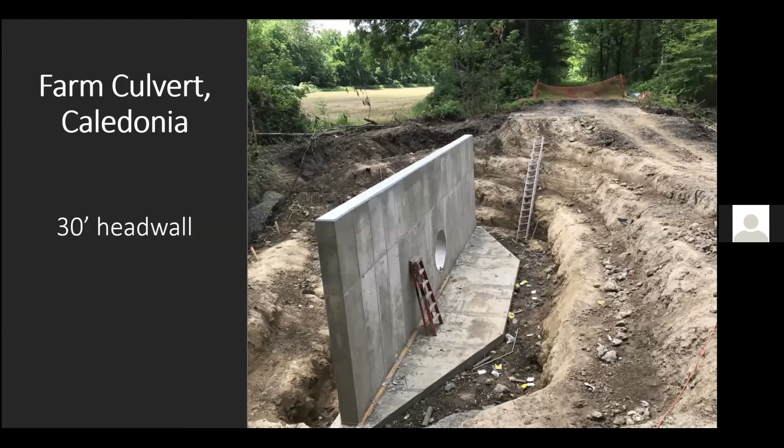This here is what we call the farm culvert. It's over in Caledonia, just north of the Erie Attica, which is north of Route 5. This is looking south on the trail. That head wall, that culvert head wall there, is approximately 30 feet long and about 15 feet tall. It's on the east side, and it's a poured concrete wall.

Here we have another angle. Once we got the two head walls up, then we had to cut into the trail. And that culvert pipe is 3 feet across. This is again looking south.

I'm sorry, I had to admit someone. I have to multitask. So we're looking south on the trail.

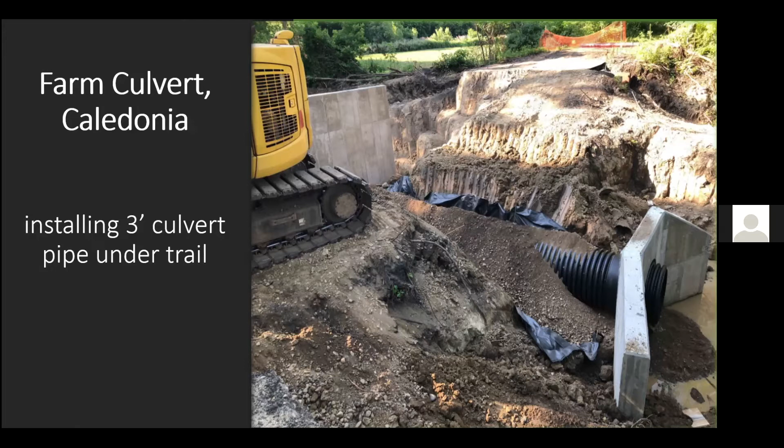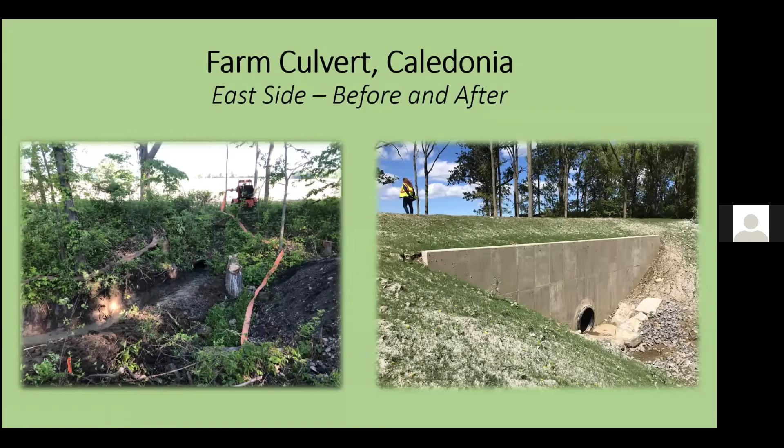Okay, so here is the before and the after on the farm culvert. On the left, you could see the old pipe in the middle, the center of the picture, and it's half buried. Really doesn't help anyone as far as drainage goes. On the right-hand side, you can see we're looking north on the east side of the outside of the culvert. I know that's a lot of direction there, but that's where we're looking north.

So you have a nice before and after picture here. If you look in the midway part of the picture, you'll see light green grass, and then you see the dark green crop out in the background. The reason why we put so much effort into this culvert was that the farmer here was having a lot of difficulty with flooding. As you can see, when the crop was planted, it had to go around the flooding, which is what the light green was. So this was a good time to do it. We decided to fix this issue, and now the farmer can use his field next year in its entirety.

All right, we also did some culvert work. This is called White Creek Culvert. This is just a little south of where we just were, but it's also in Caledonia.

This is some before and after pictures. On the left, you see that we had some trees growing out of the culvert. There's a lot of organic matter there on top.

The organic matter is a 50-50. It stabilizes, but the roots also cause damage over time. So it's really not the way to go as far as maintaining your culverts.

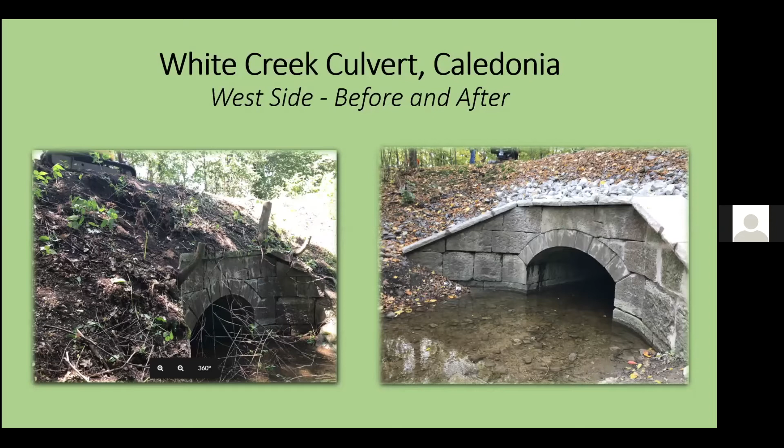On the right here, you can see they took out a lot of organic material and put in the capstones. Those are the large flat stones that you see on top there. A lot of work went into those capstones.

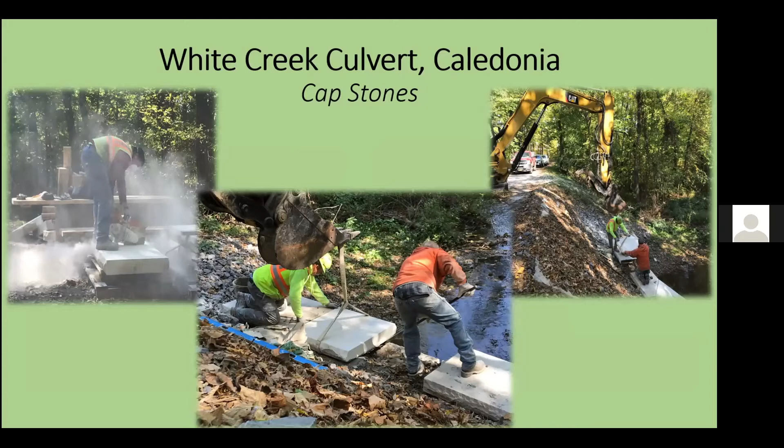Just a couple of pictures here - on the left, you see them cutting the stones right there on site. Then they had to lower them down with the crane and muscle them right in there, and then mortar them. A lot of work, a lot of physical labor went into these.

This is on the east side, same culvert. You can see before and after they were scooping out the organic material, and then now we have nice capstones. You see a lot of the cobble-sized stones that we put on top of the capstones to assist with stabilization

of the trail and so forth. Because that was one of the bigger issues - it was eroding into the trail. And we weren't about to lose that.

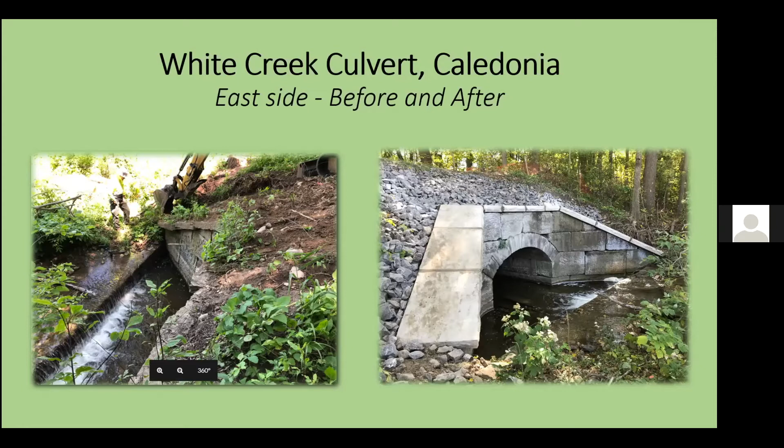So that's another culvert. One of the things we wanted to do was to remove this bridge here, this railroad bridge.

It really wasn't a great bridge to begin with. There was a lot of issues with it. And so we thought this was a good time for its removal.

Just because we removed it doesn't mean we couldn't use some of it. So on the left side, you see the crane removing the handrails. And on the right, you see the decking of the bridge being carted off to be used on another project.

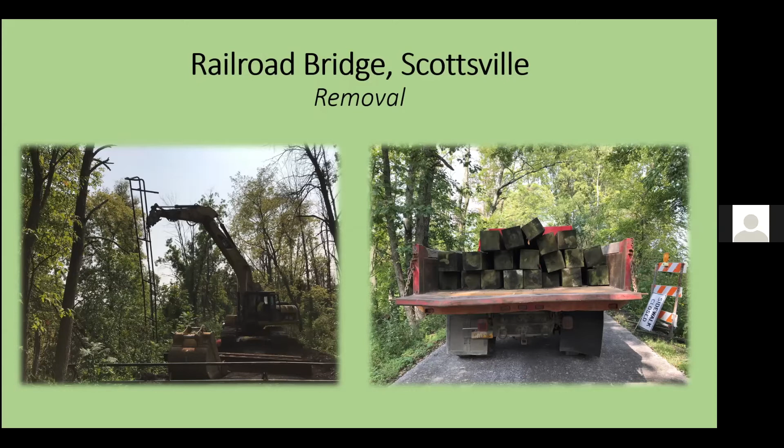This is once we removed the decking. This is about a 20-foot gap that we had here.

Interesting enough, a lot of people called this different things. We called it the railroad bridge. Some people called it the cattle crossing. Others called it a box culvert.

When in actuality, we found an overhead clearance sign on the outside of the bridge. So it was actually a road under there, which nobody was really expecting until we saw that. We found that old bridge sign, which was pretty interesting.

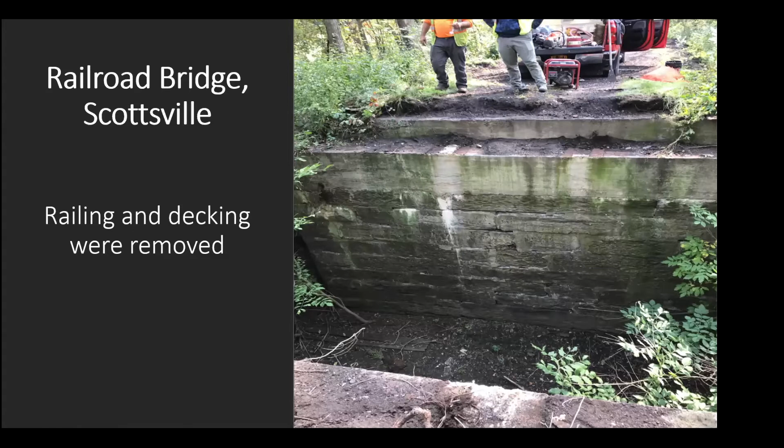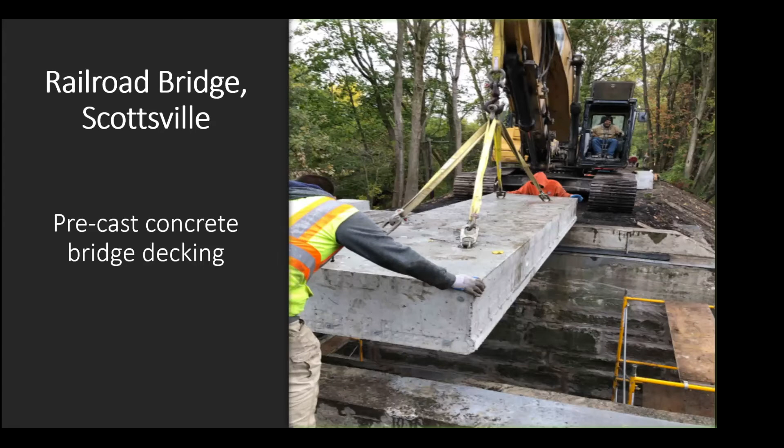So we put a new decking on the bridge. This was precast concrete bridge decking. There were about, I'm going to say, 4 to 5 sections. I honestly don't remember how many I saw, but each was about 6 to 8 tons. So it's definitely going to be able to handle anything we give it in the future that's going over it.

Here you see a before and after. Now, the after picture on the right isn't completely finished. What's really going to be awesome about this bridge is that the trail surfacing is going to be on the bridge as well. So you're really not even going to know that you're on a bridge, other than the railings giving that hint. But surface-wise, it's going to be the same surface on the trail as on the bridge, which will be a really, really nice feature.

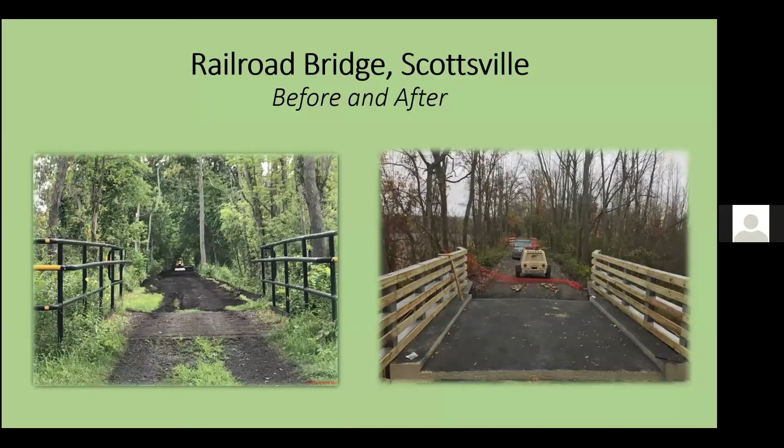One of the things we're trying to do, again, is reuse things as we see fit. So some of the reclaimed canal culvert stones are being used on either end of the bridge approach to dress them up a little bit and to incorporate our history.

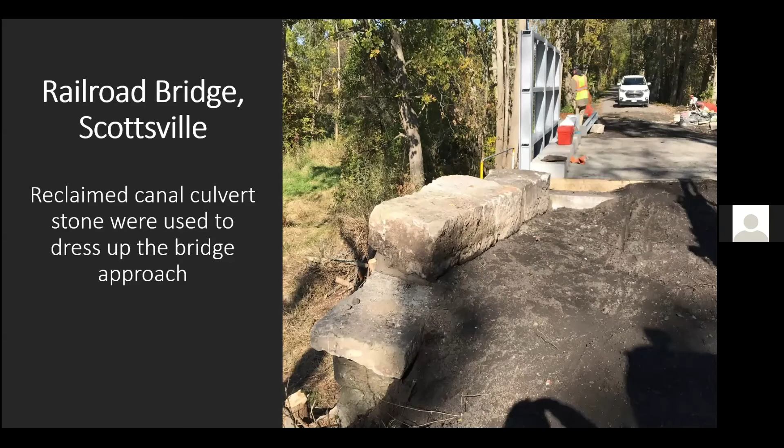Now this is Dugan Creek in Caledonia. This is a sensitive wetland south of Lehigh Valley Trail. We have lots of critters in this area - we've got mink and bobcat and heron, hawk and eagles, and of course beaver, which is what caused the issues that we had here.

The beaver over the years chewed through a fence and the culvert system got compromised. And so we had a lot of flooding in this area. This section holds approximately 30 million gallons of water. It doesn't look it, but it's an estimate.

Because it's such a sensitive area, we had to work closely with DEC on the design and process of how we were going to go about fixing our culvert system. So once they approved the permit, we had 5 days to de-water, to remove the old, build the new, and to restart the flow. And as you can imagine, dealing with 30 million gallons, it was quite challenging for all the crews.

I really have to hand it to our engineering crew in those 3 regions, our project manager and everyone involved. They really did an excellent job of keeping tabs on things, and not to mention Killer Construction, which was the construction crew working through it.

They were very concerned about the wetland sensitivity as well, and so we were all on board with wanting to do the best thing, the best way we could. But we all knew that at the end of the day, in order to make that omelet, you have to crack some eggs. So we were just trying to do it the best that we could. The plan was well thought out.

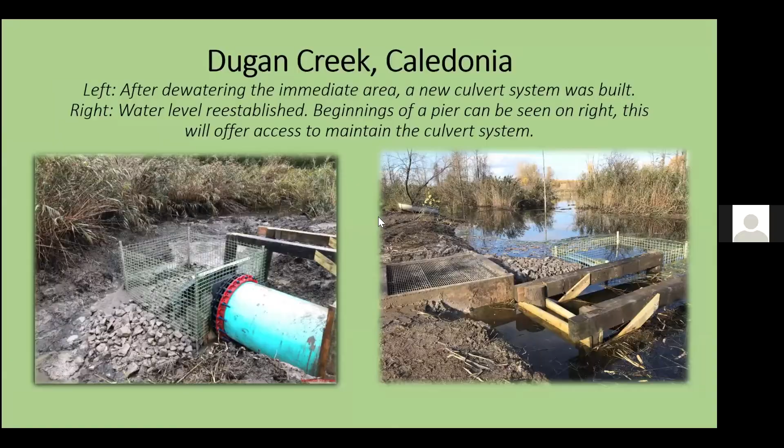Okay, so let's get to some trail resurfacing. This was the whole major part of the project. This picture is showing you the milled surface, the removal of the top surface of the organics, pretty much - they would take a couple of inches depending on the height and what we needed.

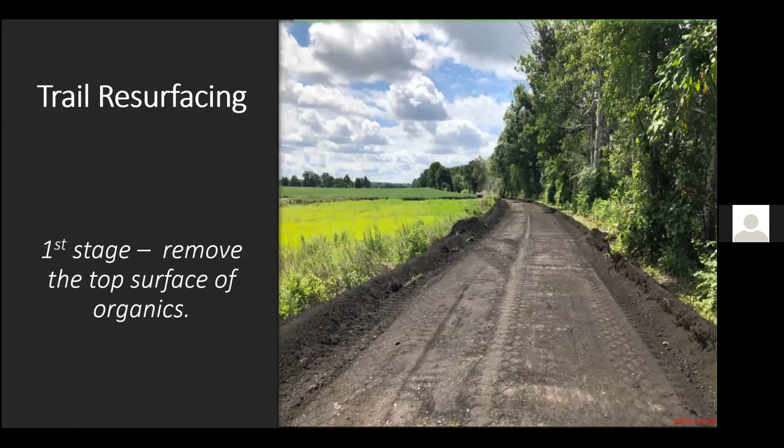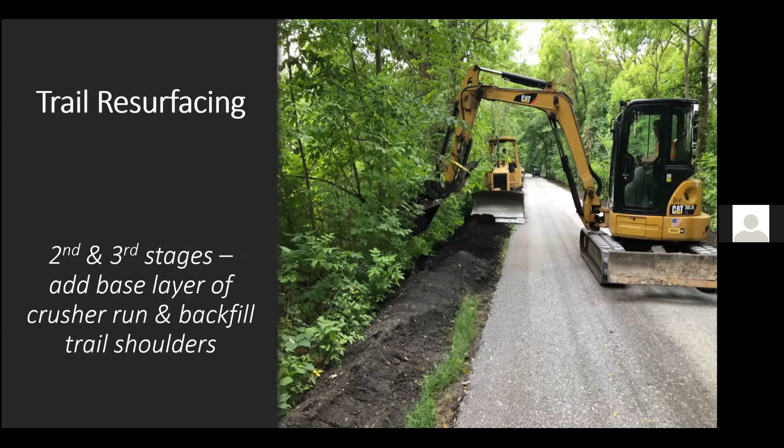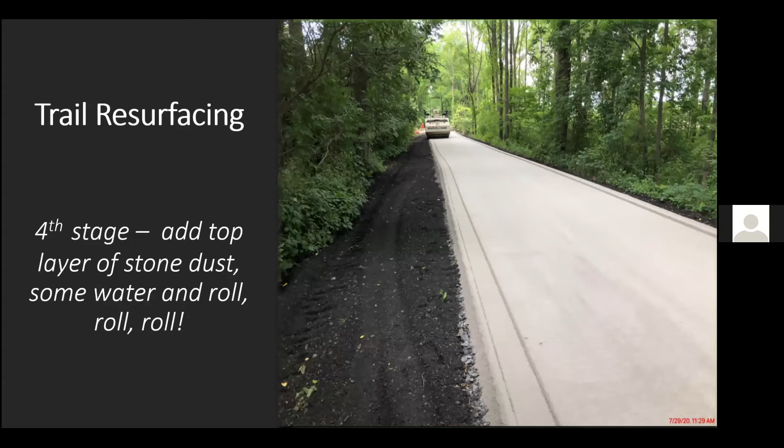It varied throughout. Then we have our second and third stages of laying the base layer of a couple inches of crusher run, and then we backfilled the trail shoulders. It definitely had to be well choreographed - there's not a lot of room to maneuver on the trail, so everything had to be very precise in the order of what happened. Then the fourth stage is to add the layer of stone dust, apply pressure and water, and roll, roll, roll.

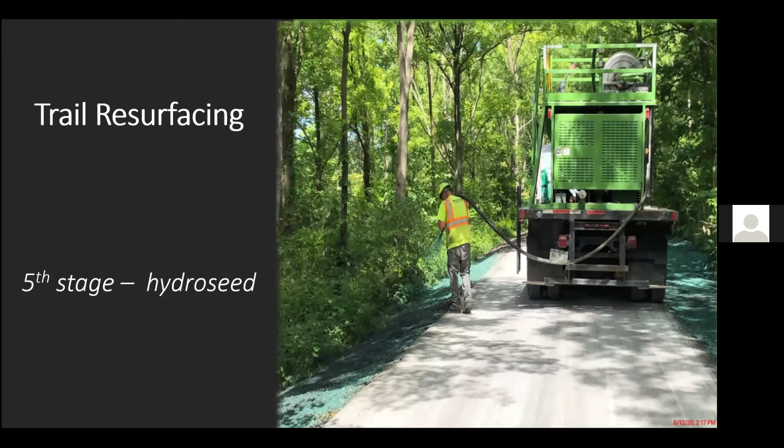And then we added the hydro seeding - that's a mix of grass seed that's like super grass seed. It started growing within a week. The stuff was pretty amazing.

While we were doing the trail resurfacing, we did have some special requested areas. The picture on the left is how the trail was resurfaced in the Dugan Creek area - remember, that was a wetland area, so we couldn't just mill everything off the top like we did elsewhere. We did very minimal milling so we wouldn't hurt the sensitive area, and then the trail was built up from there.

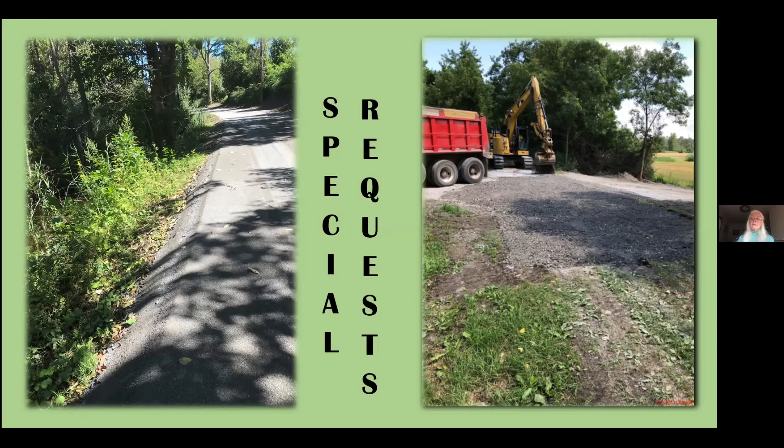So all that vegetation you see on the left-hand side of the screen wasn't hydroseeding - that was just the natural flora that survived during the trail creation there. On the right-hand side, you see a farm lane intersection. A lot of the farm equipment nowadays is a lot bigger than it used to be, and our trail was definitely hurting because of it. So at all the farm lanes where we resurfaced, we beefed it up with more material so the trail wouldn't feel the effects as much.

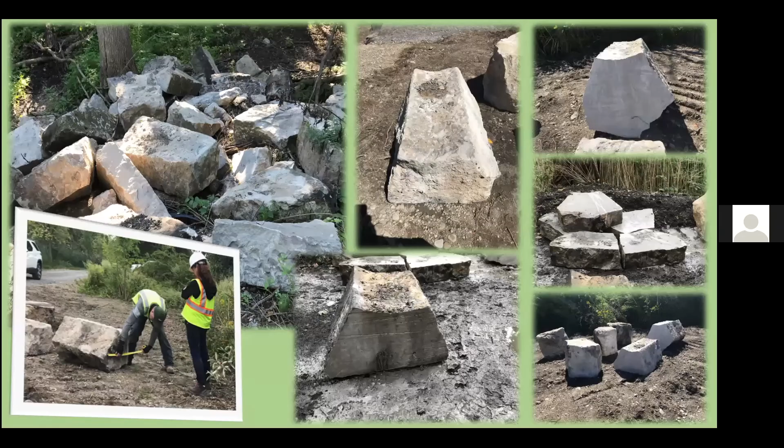Our preservation efforts were focused on alternative ways to save the past. Some of the stones were quite large. Some of them, like the barrel type stone on the bottom left that you see the gentleman measuring - that's our project manager, Nate - those are called barrel stones, I believe, and they can be up to 6 feet long. Some of the other stones, like the ones in the middle, have an interesting concave shape to them; some of those could be about 4 feet wide. So we were dealing with some really heavy stones.

The picture on the right-hand side is what we reshaped these stones into. The stones back then were shaped for what they needed then - now we're turning them into what we need now. So we flattened off some of the ends on some of them, we cut up some of the other ones, and check out what we've made. We've made some amenities - we created a picnic table.

The picture on the left - I'll never forget that day being out there with the guys. It was painstaking to watch them. They were trying to line up those big rocks on about 3 bolt holes. That was very difficult to find, as you can see. They were down on the ground doing the best that they could.

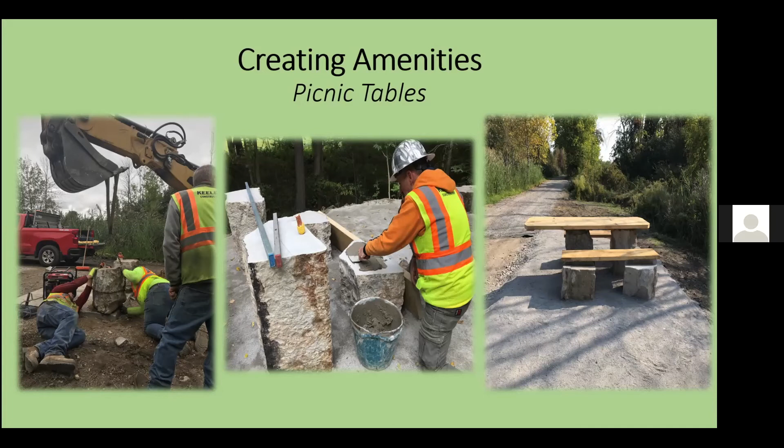And then, when they were putting things together, they mortared the benches and the tabletop to the stone there. That wood is white oak from North Carolina. So now we have rest stops with these awesome, very unique picnic tables.

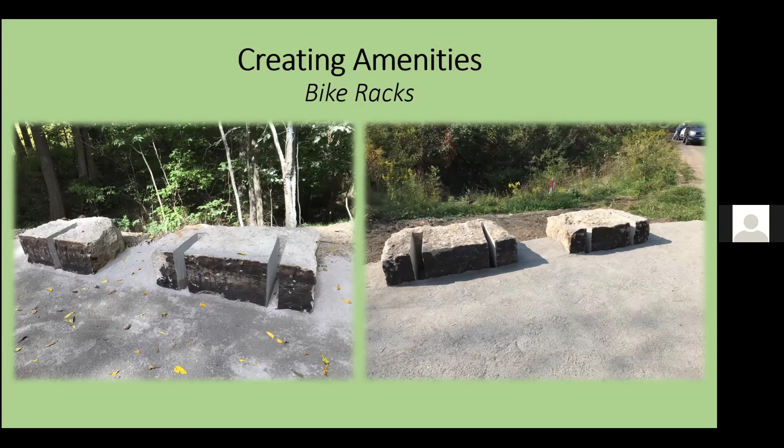Along with the picnic tables, we also tried a new design for bike racks. These are some of the old canal stones that we cut with a special saw. It was pretty much like if you could picture a chainsaw that was on steroids - this thing was huge and bulky. It had a special chain, obviously, but it was able to cut through these rocks. Some of the rocks didn't take the cuts very well; others took them and were fine, so we were able to use them.

So now we've created these rest stops. This rest stop is located at White Creek. If you remember a couple of slides back, we did the culvert capstones over here, so you've got some really awesome features to look at here. Each rest stop does have a picnic table and a bike rack. The other picnic table I showed you before was at Dugan Creek. So now we've got 2 rest stops, and we're pretty happy about that.

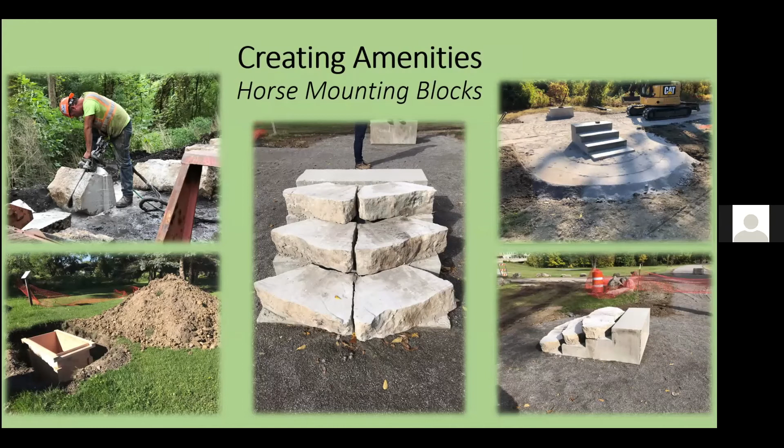The last amenity that we created were horse mounting blocks. As you can see in the upper left, we took a couple of slices of some of the barrel stones, and then we poured a concrete base. This particular set of mounts is at South Cattaraugus Park. The picture in the middle is not completely finished. There was some fine tuning, some finishing mortar and grinding work that still needed to be done, but this gives you a good idea as to what the final picture is going to look like. So now we have some amenities for our horse folks as well.

So now we're just going to go into a couple of sketches of what's going on in phase 2. Remember, this is from Cattaraugus Park to Genesee Valley Park. That's the 10 miles. However, the 2 miles through Genesee Valley Park, which makes our connection to the Genesee River Trail and the Erie Canal and Empire State Trail, it's only going to be wayfinding and trail counting, as that location is already paved. So the resurfacing ends at Ballantyne Road.

So here, north of Cattaraugus Park, our trail crosses Scottsville Road just south of the I-90 overpass. I've seen worse crossings, but I've seen better crossings, and this is a crossing that we're definitely working on. We can't do it alone though. DOT has some old style guardrails there which we can't touch, but Parks has some guardrails that we can, and so we do have some room to move. We're going to add some features, some of the horse mounting blocks so folks can cross that safely, and more room in the area so people can get across as well. We're looking for that to be one of the first larger projects of this phase.

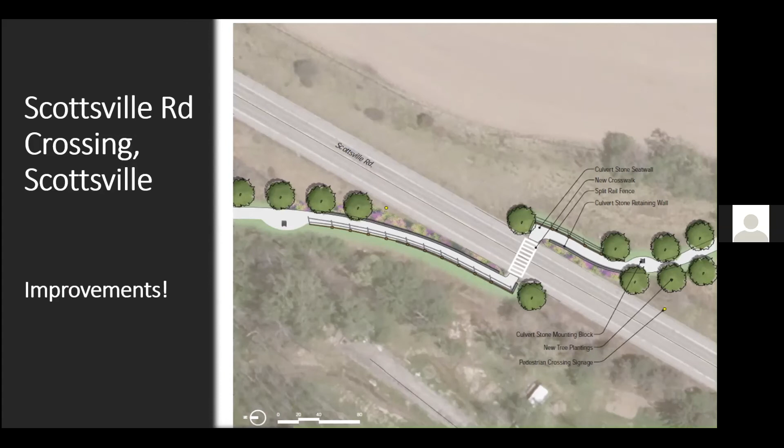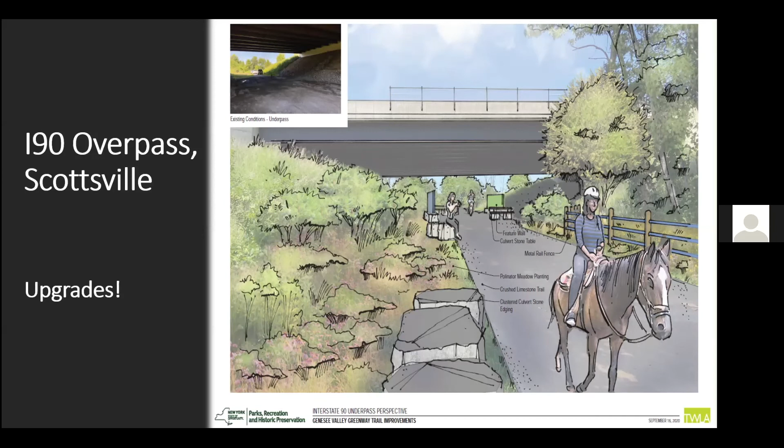So we're kind of excited. If you could see the upper left inset picture, that's what it looks like now, so there's definitely room for some beautification in there. Now, this is really exciting — this is our Lock 2. It is just south of Brook Road, north of Morgan Road.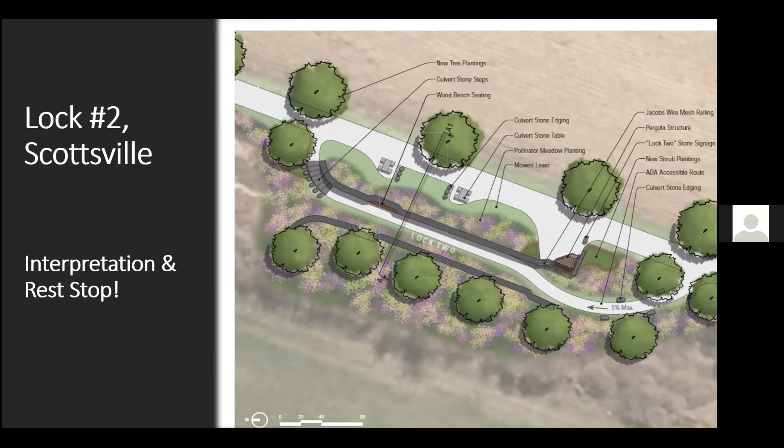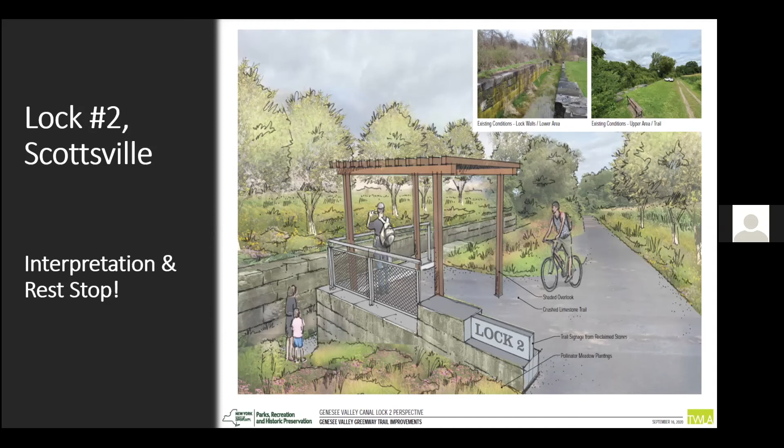Here's just another quick perspective. We're adding a pergola, and again, this is just renditions. They're not exact. We've tweaked them since we've received these renditions, but I didn't have anything newer to show you, so I just wanted to give you an idea of what it's going to look like. We're going to have the pergola and a safer viewing area so that folks don't fall in accidentally. And you don't see the picnic tables in this picture, but it's a nice picture of the pergola with some shade.

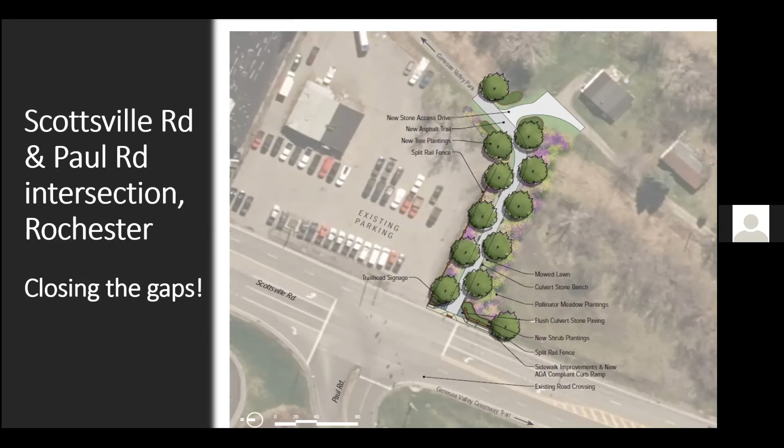It's definitely going to have a nice parking lot, and it's going to be a good trailhead for sure. But for now, all we're doing is putting the trail through here. Those of you that might know this section of trail, you're walking through a parking lot right now. So we're going to keep this on park property, and hence we'll be able to close a gap, one less gap than we had before.

And I just want to thank you again for your time today and for supporting the Greenway, and just looking forward to seeing what the future has in store for all of us.